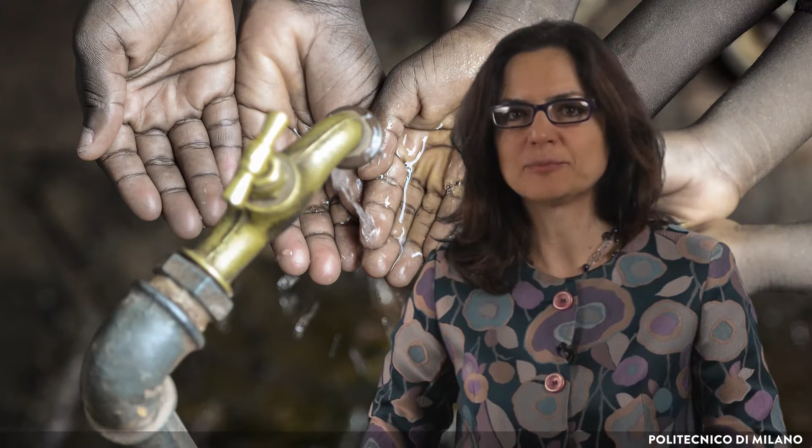This lecture regards water cycle and waste management.

The first point is water supply. Water is essential for the environment, food security, and sustainable development. Fortunately, we have different sources of water: rainwater, rivers, lakes, and groundwater. Because of rapid population growth, combined with industrialization, urbanization, intensification of agriculture and water-intensive lifestyles, a global water crisis has developed, exacerbated by climate change. Access to safe water and sanitation remains a problem in many regions of the world. In fact, about 660 million people do not have access to drinkable water in the world.

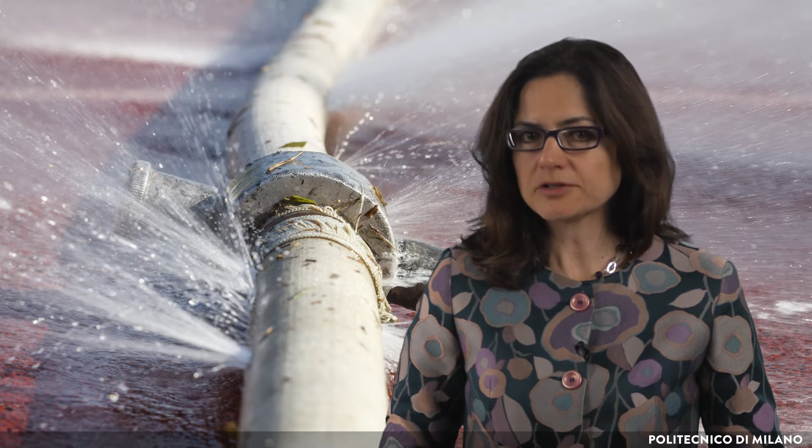Water availability is also affected by water loss, that is, water lost through leakage in distribution networks. In many cases, water loss is more than half. To reduce this problem, effective strategies and applied technologies to control leakage are needed.

Other strategies for improving water availability are to reduce the amount of potable water used for non-potable applications and to reuse treated water. In relation to water conservation, design and management of communities and buildings have a pivotal role. For example, design can support installing efficient equipment in buildings, especially for toilets, and developing systems to harvest rainwater, as shown in these figures.

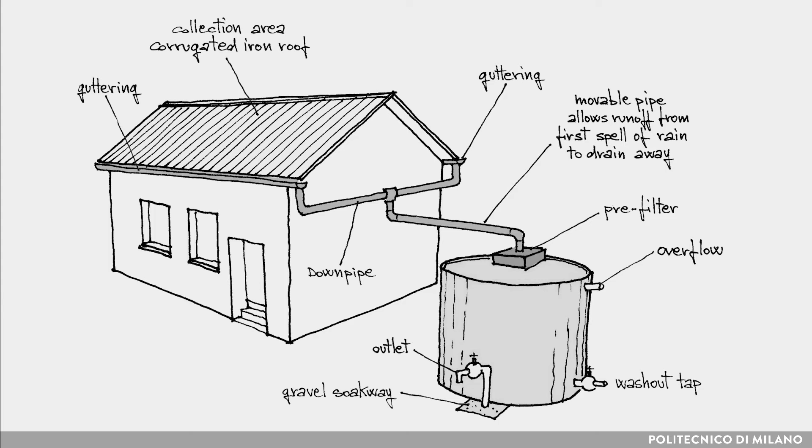In addition, clean water supply could be improved by norms for water quality from various sources and related standards for different applications, and by regular checks of the overall supply system.

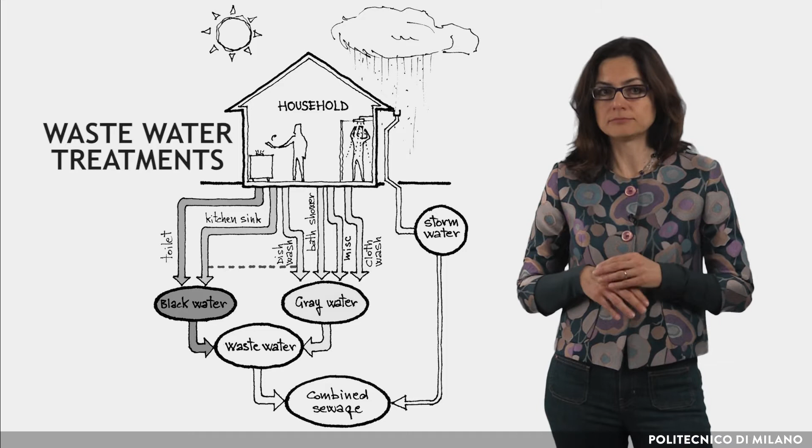Let us consider the other side of the cycle, wastewater. Wastewater treatments are the basis for preventing water-related diseases, for preserving land and water safety, and for reusing water. Wastewater collection and treatment are not available in many regions of the world. Globally, we have 700 to 900 million cubic meters of wastewater per day in the world, and most of it is not treated. However, many treatment systems are available depending on the scale and the local conditions.

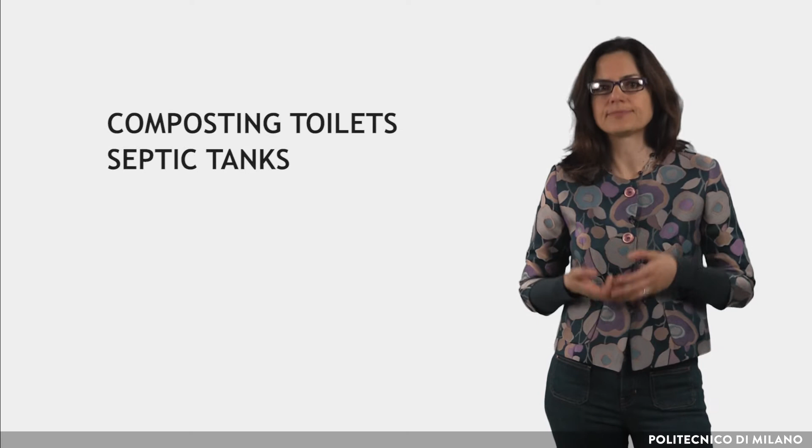For treating water, we can have big plants for large communities or small systems such as composting toilets, septic tanks, Imhoff tanks, and other on-site treatment systems.

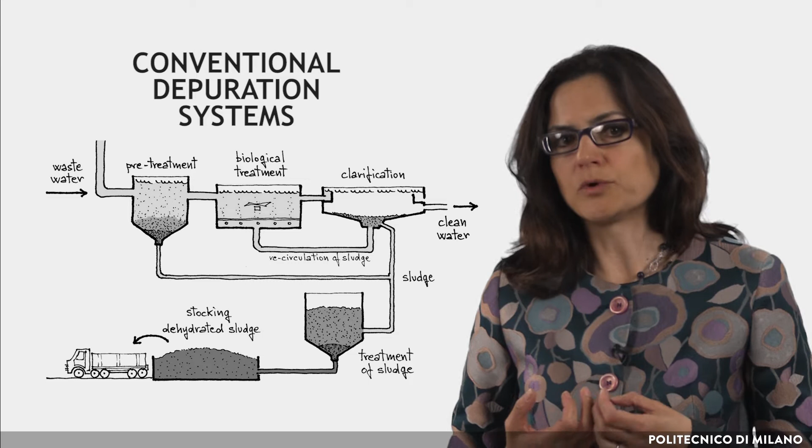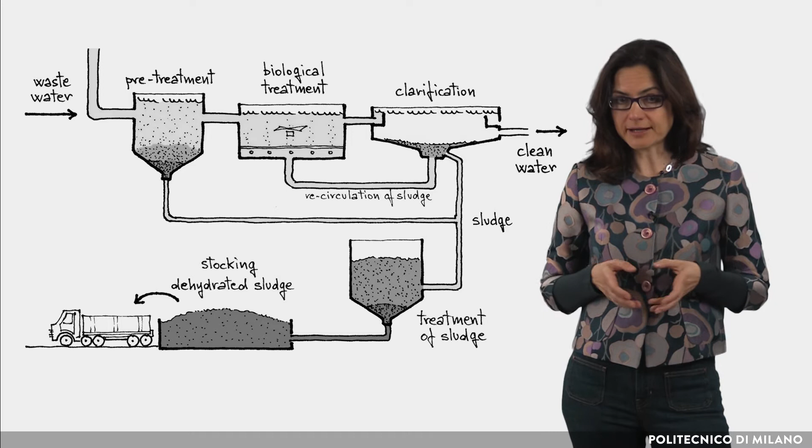The picture represents a scheme of a conventional plant where wastewater is treated, producing clean water and sludge as output. Many physical, biological, and chemical stages take part in the depuration process. Sludge is separated and collected and then treated by anaerobic or aerobic digestion. Biogas production is possible by different technologies at different scales.

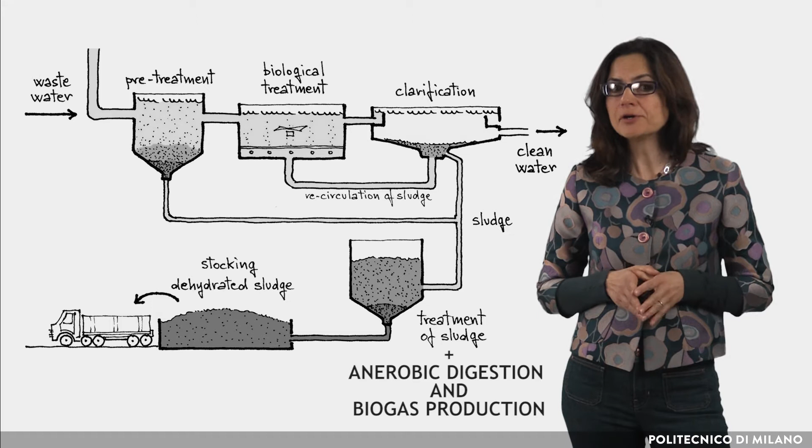Biogas production represents an effective example of how the water cycle and energy are connected. Biogas can also be upgraded for producing biomethane, depending on the context.

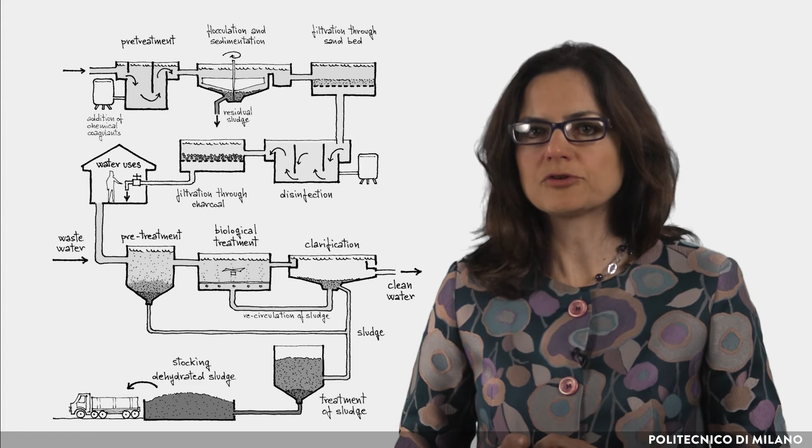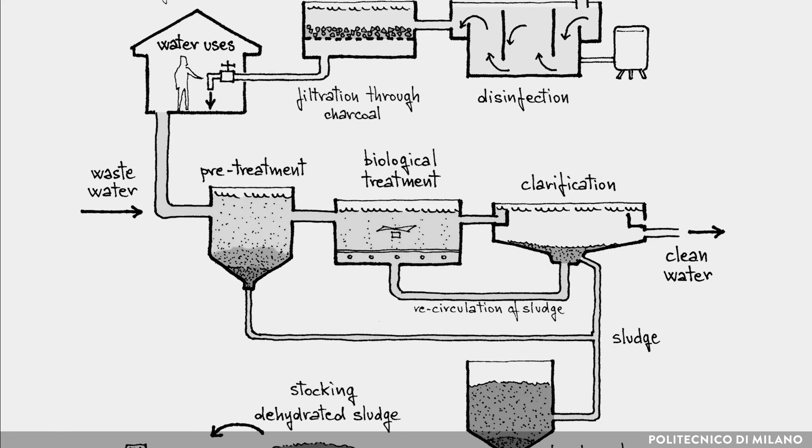Let us focus on the input and the output of the process. The picture represents a scheme explaining how water supply and wastewater treatments are connected, referring to the water use in buildings. It means that the water cycle has to be faced holistically, considering all the available and accessible technology in an integrated approach.

Let's move now to the second topic of the lecture, waste, which is one of the most important flows of metabolism in communities. Urban waste represents a sanitary problem firstly, but it can become a source of energy and matter.

There are still many cases in which municipal solid waste is usually dumped in landfill sites or open dump sites, leading to air and water pollution. Conversely, sanitary landfills need to be carefully designed, and people need to be trained in managing and maintaining them.

To face the problem, it is important to collect and analyze data. They regard mainly waste generation per capita, waste composition, and main practices for waste management. These data can be highly variable as they depend on many factors.

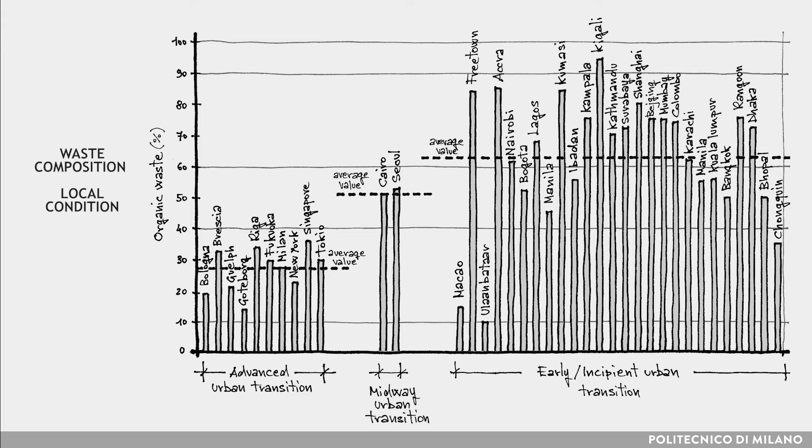For example, in the developing world, composition consists mostly of organic material from food consumption, ashes from fuel wood and charcoal. The composition, in particular the quantity of organic matter, affects the content of humidity and the heating value of waste. These parameters affect the suitable technologies for waste management.

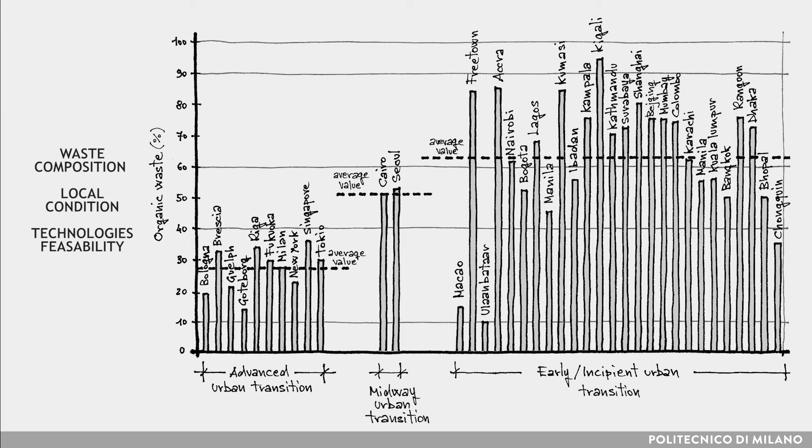Further, other site-specific factors should also be taken into consideration, such as accessibility to waste collection points, cost of storage and transportation, willingness to segregate waste to assist recycling, willingness to pay for waste management services, and opposition to sites selected for waste treatment and disposal facilities.

The application of the 3R approach, the same adopted towards a zero-waste paradigm, could be very useful in waste management, also for facing it as a sanitary problem. 3Rs means reduce, reuse, and recycle.

Where feasible, the integrated waste management approach should include waste separation and collection, recovery of materials, energy recovery, and final disposal. The solution has to be not merely technical but also organizational. All these components are part of a whole.

In conclusion, availability of drinking water and provision of sanitation facilities are the basic minimum requirements for healthy living, and designers should take into account all these issues.